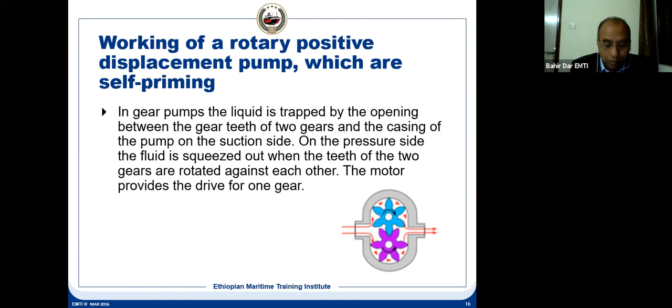This is the lobe pump. Lobe pump and the gear pump are the same, only the shape is like a lobe, that's why we call it lobe pump, and the capacity of the lobe pump is higher than the gear pump because the volume transferring from this side to that side is larger in volume. But otherwise, it is the same.

It gets trapped into the lobe, and then it goes to the delivery side where the volume reduces and delivery takes place. Another advantage of the lobe pump is they don't mesh together. Then how does it rotate? One is driven by the prime mover, but how does the other one rotate? There is a timing gear - an external timing gear.

So the timing gear is like this shaft, which is coming out and is driven by a prime mover, and where you have the lobe - this is one lobe - and another shaft which has another lobe, which is driven. There is a fine clearance here. It is not actually meshed together.

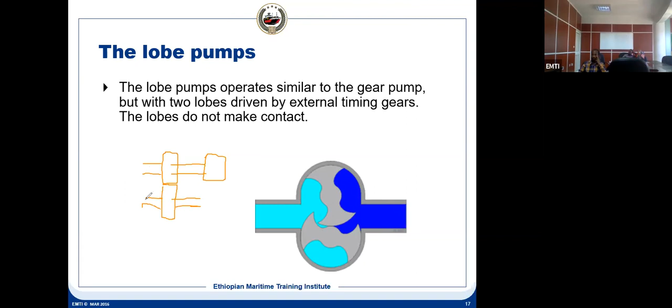But there will be, for example, a timing gear here. So there is one gear here, and there is another gear here. It is outside the casing. So when this prime mover is rotating, this lobe is rotating, this gear also is rotating. This is mounted on the same shaft, and this gear is driving this gear, and this gear is driving this lobe.

Whereas the gear pump is like this - one gear is rotating the other gear, they are meshed together. The lobe pump, they don't mesh together, so there are fine clearances, so there is no wear out. It will not get worn out because it is not meshing together. This timing gear we use for the screw pump also, so that if something goes wrong, the gear will be worn out and you can replace it. So there is no contact between the lobes.

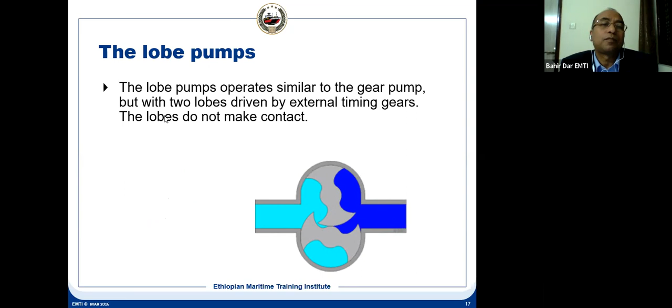Then we have another pump which is the vane pump. The vane pump also works by a change of volume. How does the change in volume take place? Suppose it is rotating in an anticlockwise direction, you have the vane - so this is the suction. Why is this the suction? Because...

This volume was here. Now this vane, suppose it reaches here - then what has happened? This volume has increased to this volume. As the volume increases, we know the pressure drops and suction takes place. What happened on this side? This side volume was from here to here. Now the volume has reduced to this.

The delivery takes place. So when it is in this position, because it is rotating in the anticlockwise direction, this is the maximum suction. After that, this vane is moving towards this side - volume on the right hand side is reducing and delivery takes place. That is how the vane pump works. So this is also another positive displacement pump.

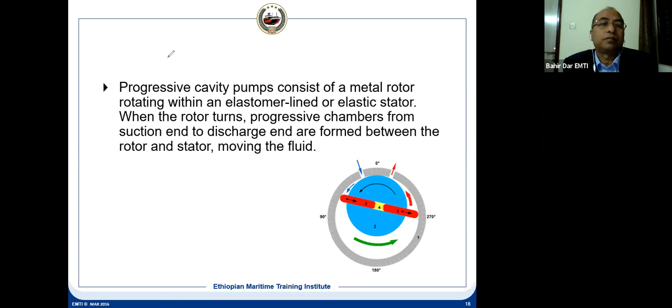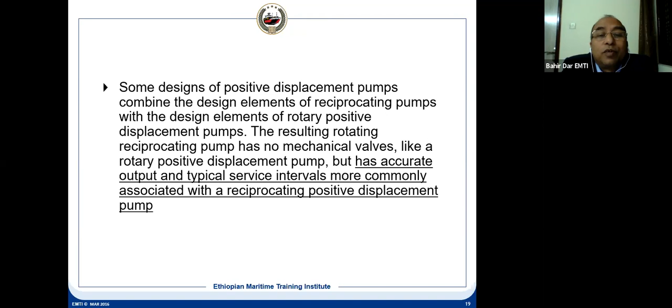And there is no pulsation also, unlike the reciprocating pump - there can be pulsation, but if it is double acting, we can overcome that pulsation. The screw pump is another pump where it is self priming, the capacity is high. As I told you, product carriers use the screw pump, and its construction is simple and easy to maintain, because the screw pump also can have a timing gear, so that the screws do not mesh together, so there is no wear out, and the timing gear can be replaced if it gets worn out.

So two or three screws, very close clearance is maintained, and they are on parallel shafts. So when the screw is turning, if it is turning in a solid medium, then what will happen?

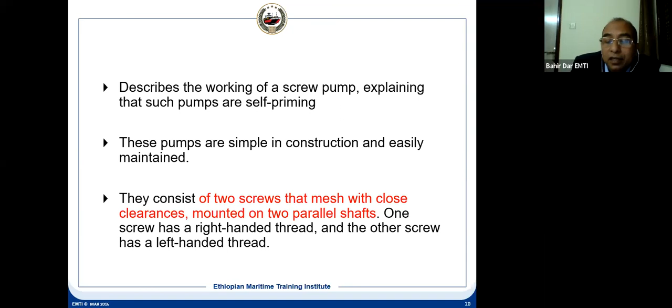The screw will move. If we don't allow the screw to move, then what will happen? The liquid, if it is rotating in a liquid, will move from one end to the other end. That is the way the screw pump works.

The screw pump, it enters from this side and then slowly it moves to the delivery side. The screw is designed in such a way that as it moves from right to left, the volume changes. The screw shape is such that the volume changes and the pressure increases and the delivery takes place.

Since the screw is not allowed to move, the fluid has to move because it is rotating in a fluid. So the cargo will move towards the delivery side, and as the volume reduces as it moves to the delivery side, the pressure will increase and delivery takes place. It can be 2 screw or 3 screw.

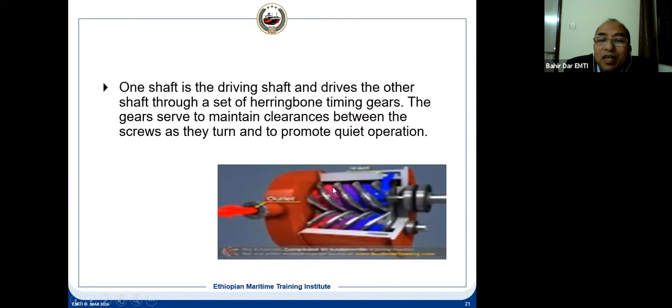But when there is a timing gear, you are keeping a fine clearance between the screws. Then what will happen? The capacity will reduce because there will be some leakage through the clearance. How will you overcome that? The speed of the pump is increased, and as the speed increases, the delivery capacity compensates.

So always, if you have a timing gear, your pump speed is at higher speed, and the flow is smooth. There is no pulsation for the screw pump. The flow is very smooth, and it is of higher capacity.

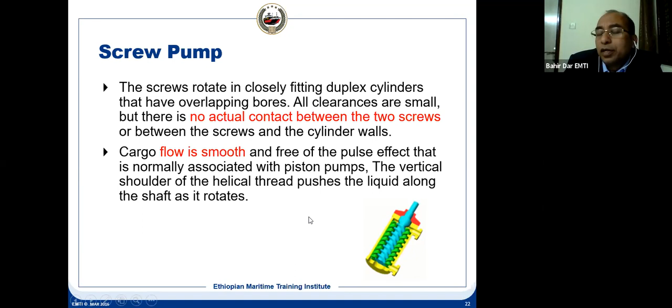Many product carriers use this kind of pump. There are oil tankers, a few of them equipped with screw pumps, and it is a positive displacement pump. It can be horizontal or vertical, and the pump is in the pump room while the prime mover is in the engine room.

So it is basically small oil tankers and product tankers, like 20,000 to 30,000 tonners, that use this kind of pump. For products, that's why screw pumps are suitable for product carriers. And tankers with very high viscosity cargo, such as molasses, use the screw pump because molasses is very high viscosity cargo which a centrifugal pump cannot pump.

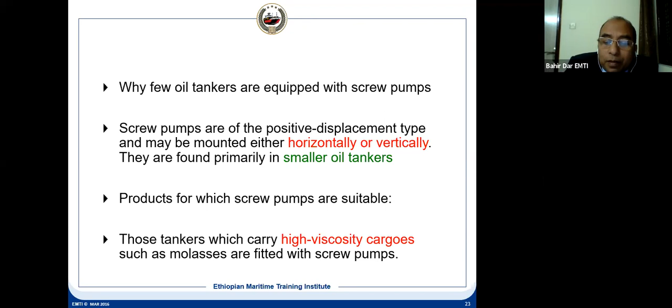Now there is something called surging. What is surging? What is the problem? Suppose you are discharging and your ESD, emergency shutdown, is activated, and the valve is shut immediately. Then what will happen? There will be a pressure surge.

It means once the pressure is going and hitting the valve, it will reflect on the opposite side, and the pressure will increase very high, and that can rupture your valve, that can rupture your pipe. So that is the pressure surge.

But to avoid the pressure surge, what happens is you have the ESD. When ESD is operated, your valve will close, but it will take around 14 seconds, slowly closing. If it closes immediately, then there will be a surge that can damage the piping system, valve, and all. The surge pressure becomes so high it can damage the piping system.

So it is like water hammering, like when you open a steam pipe, if there's water hammering, to avoid that we crack open the steam so that all the water comes out. It affects the same way in cargo piping, because the change in velocity of the flow in the system - it is moving in forward direction and suddenly it will reverse direction and the pressure will increase. So sudden velocity change takes place, caused by the operation of the valve and the pump.

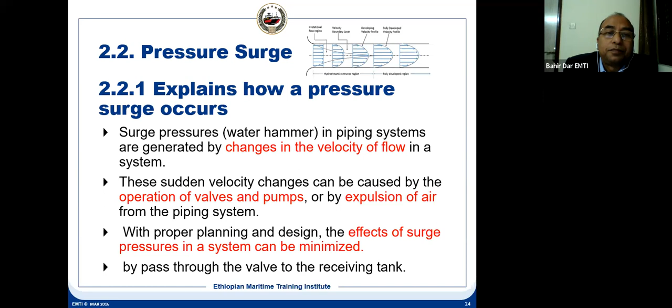So the pressure surge leads to excessive pressure stress, particularly caused by the rapid expulsion of air. If you expel the air rapidly, then also it can happen, because the flow of the liquid will be very high and the pressure can increase and fail the pipe.

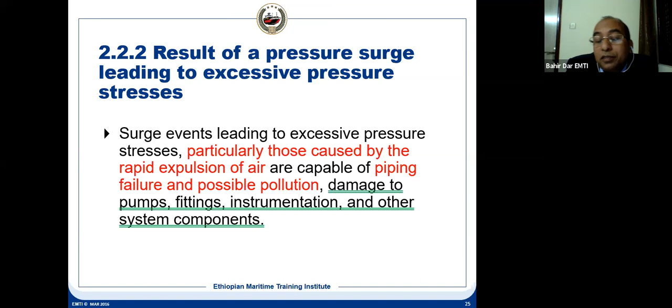And once the pipe failure takes place, then pollution can happen, as well as the pump can get damaged, the instrumentation - if you have a sensor it will get damaged - fittings and other system components, valves and all can be damaged. So the rapid closure of the valve can cause pressure surge.

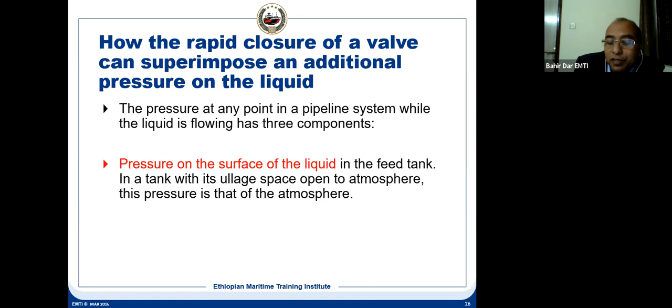There are three components: pressure on the surface of the liquid in the feed tank, with its ullage space open to the atmosphere. This pressure is that of the atmosphere, because on the liquid surface, if the tank is open, the pressure will become atmospheric pressure, and it will act on the liquid surface.

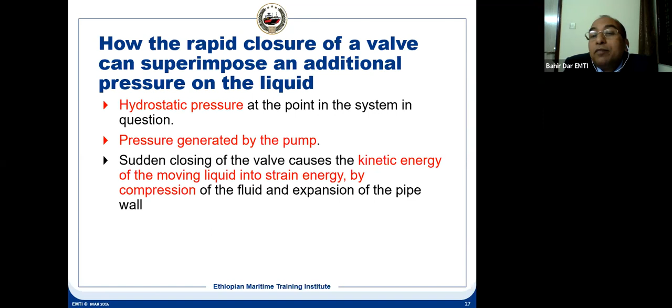And the hydrostatic pressure at the point system in question - when there's rapid closure of the valve, there will be hydrostatic pressure plus the pressure generated by the pump, because the pump is still running. Sudden closing of the valve causes kinetic energy, because the liquid cannot move further and it gets strained. This is strain energy by compression of the liquid - it gets compressed, and since the liquid is incompressible, expansion will take place, the pipe wall will get expanded and it can get ruptured.

That's why rapid closure of valves should not happen. It should be closed very slowly, so that this sudden conversion of kinetic energy into strain energy will not happen. Then there's the strain energy by compression.

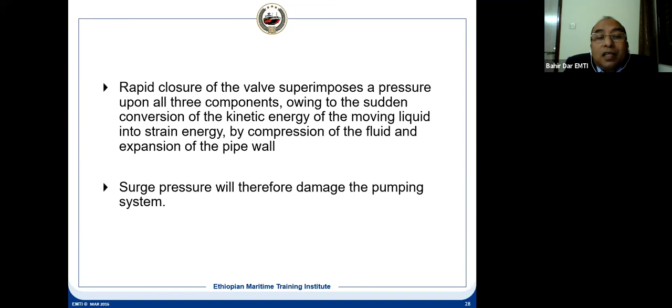The fluid gets compressed, and since fluid is incompressible, expansion of the pipe wall will take place, and surge pressure therefore damages the pumping system.

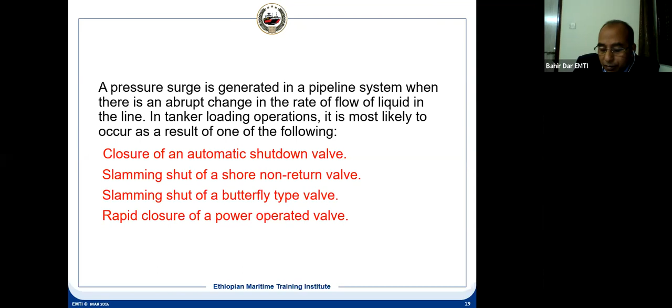So when the pressure stress becomes excessive beyond the strength, the component will get damaged. That is the problem - it will get ruptured, leading to an extensive oil spill.

Next is the tanker safety culture. If you see dry cargo vessels working and tanker vessels working, the safety consciousness and safety culture is more in tanker vessels than dry cargo vessels, because you are carrying a dangerous cargo which requires you to make the ship safe. The safety concerns are more in tanker culture, and it is inbuilt. You'll do certain things automatically, it becomes your habit because you know the consequences. Safety culture should be everywhere, but more safety culture should be there in tankers because it is more dangerous.

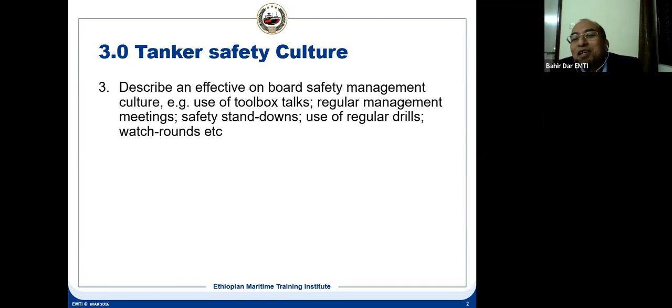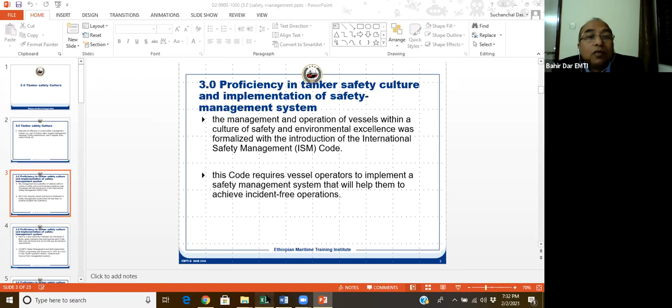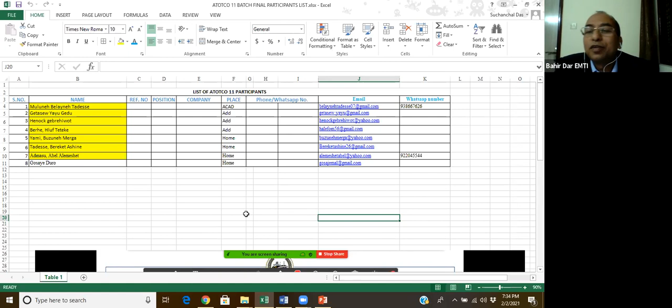So today, 3 in the Addis office, 1 in Bahir Dar office, and Abel, Yami, and Tadesse are from home. Who is Mr. Avi? Can you identify him? I can't, sir - all I know is Mr. AB here, that is the display, but is he online or not, because he's not speaking. His microphone is off, muted. Let me see - Tadesse, Mulyuneh, Getasew, Henock, Berhe from Addis, Yami, and Admasu are there, it may be Bereket or Gosaye. Gosaye was there in the Addis office yesterday - anybody from Addis office, just confirm, was Gosai there yesterday, correct? Yes, okay, but Gosai was not this one. Then who is this AB? Anyway, if anyone can find out, just text me or send an email on who this AB attending is. He is Bereket. No, still it shows Mr. AB. So okay, we'll close it, we'll confirm tomorrow who that was, and we'll close here for today. Tomorrow we'll start at 8:15.